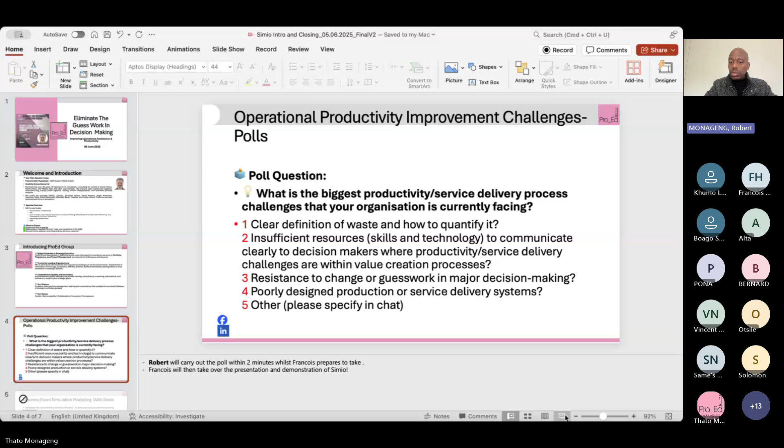So you want me to share from my slides, or are you going to use yours? I am sharing, still sharing. If you can just put them back, because I can't see them from here. We've kind of lost them, at least from my side. I don't know if anybody else can see them. They're back now, so maybe you can go into presentation mode.

I have a simple role this morning, but very important, because it creates an expectation of what we are going to get in the next delivery by Francois. It's really the main reason why we are here this morning.

I think we will all agree that we have a lot of challenges in terms of productivity in Botswana, and this stems all the way from operations to policy. But here we are talking more in terms of operational productivity. So I want those who are in industry to think carefully about the challenges you are probably having in your organization in terms of productivity and service delivery.

I've put at least 5 statements or questions for you to think about. If question 1 resonates with you, type 1 in the chat box. The question is, in terms of productivity or service delivery challenges in your organization, would you say you are currently struggling with a clear definition of what is waste and how to quantify it within your value creation processes?

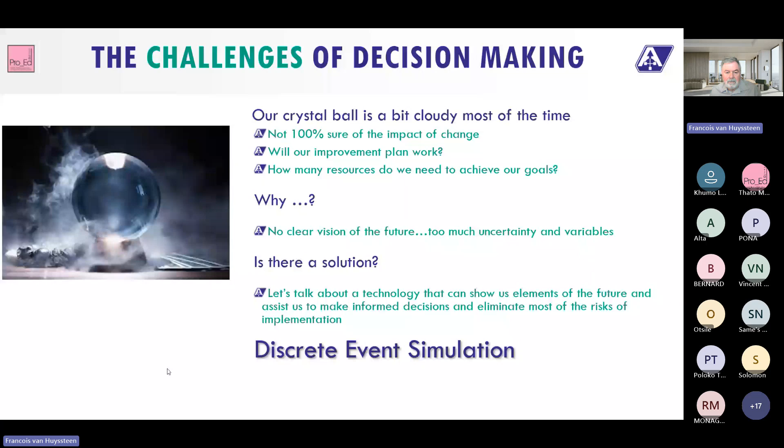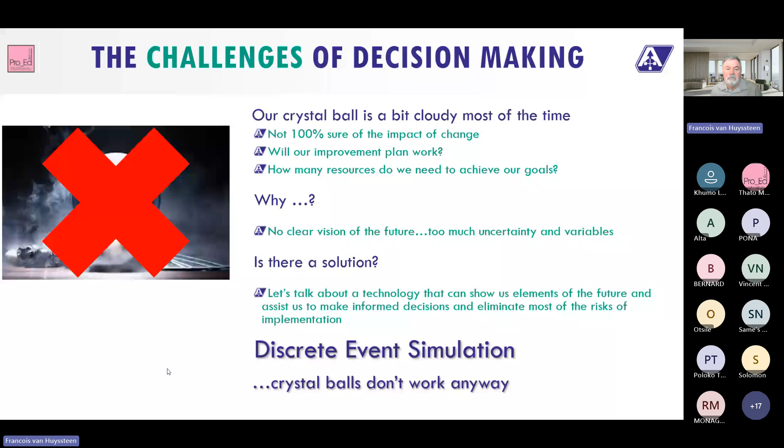So our solution is discrete event simulation, and that's what the rest of the talk is going to be about. Just a bit tongue-in-cheek, crystal balls don't work anyway. We have to make scientifically based, solid decisions. We cannot just play a guessing game. One of the feedback points already was that guessing in decision making is a problem. And I share, many people say, but I have a gut feeling this is going to happen. Yes, you may be right, you may be in the right direction, but you cannot quantify that upfront. And that's one of the big problems. You cannot quantify how change will impact your business. That's the kind of thing we're going to look at and that we can offer you with this technology of discrete event simulation.

So let's now dive a little bit deeper. What is simulation? If you hear the word simulation, I guess different people think different things, have different answers. A short description is it's a model of some sort that represents reality. I think that is basically, in a nutshell, what simulation is.

Now let's look at some examples. I'm pretty sure everybody knows about flight simulators, where airline pilots are trained to handle different situations, because the flight simulator is simulating or representing different runways across the world, different weather conditions, different planes that they're going to fly with, which have different controls. So in the end, it's about training those pilots with this. Remember, what's a flight simulator? It's just a huge model of all different scenarios that sits in there, and you choose one, say, right, we're going to do this route, and then you represent that particular route. And he sits in that flight simulator.

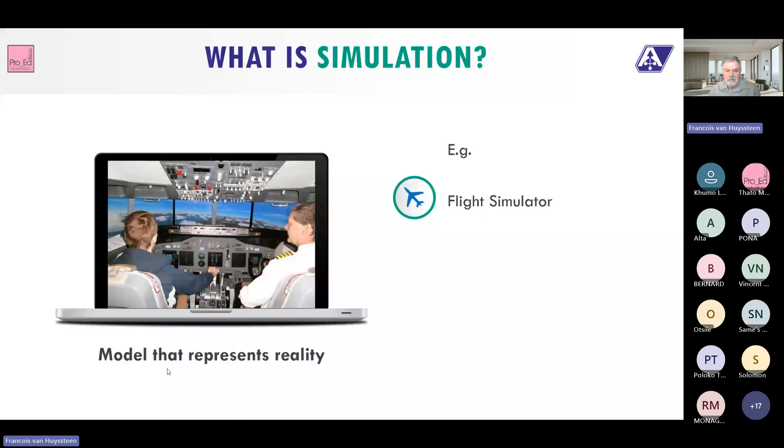Then on a completely different scale, maybe more where people are relaxing and enjoying themselves, games. The games you have these days, played on computers or online, are absolutely insane - the plots in these stories, the animation you see. But what is it really? Each of those games is simulating or representing some other situation, whether it's a specific battle, or a race that you are doing in that game, and you want to come first, obviously, and you race against all these other drivers. It's simulating part of a reality of some sort, and you are in the driver's seat and have to make decisions in that game, right? So that's the kind of thing all of us know, right?

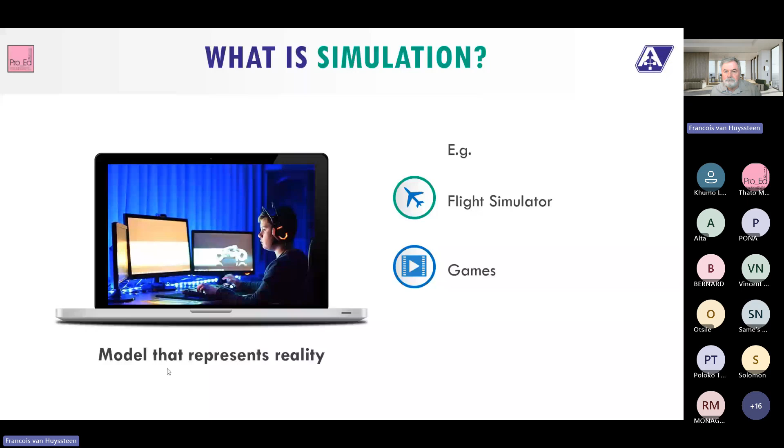So now, one step further, let's talk about discrete event simulation, or DES for short. What is that now? This is now with Simio, the tool that I'm going to show you, in mind.

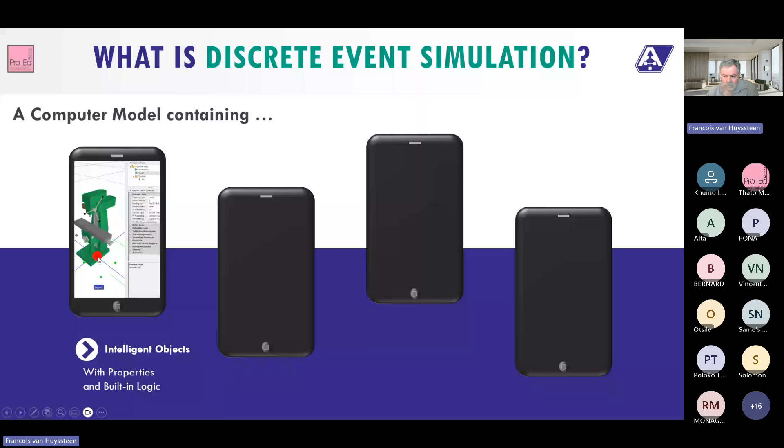So it's a computer model containing intelligent objects. That's an object that you see in the Simio environment, the software. It's an intelligent object with properties and logic built in that gives it that intelligence. It's also a model containing further process logic. These objects and the logic in the background are driven by events.

Now, what could be an event? Let's say, for instance, we model a new bank branch. The bank wants to set up a new branch. They want to know how many tellers they need, how much waiting space they need, and so forth. So an event will typically be when a customer walks in or through the door of that bank. That is an event. Each time a customer walks through, that's an event that kicks off a process.

The process is typically: the customer will look, is there a teller available? He will walk to that teller and start his transaction. If not, he'll say okay, there's the queue, so I'll wait in the queue and so forth. So these models are driven by events, and it could be various events, but it's all driven by events.

Then further, these models do have animation. That means you can actually visualize your process. It's not just a bunch of tables with numbers all over the place and plots that you get graphs from afterwards, that you have to make sense of. You have a picture you can look at that shows you your process in reality, and that really makes the model come alive.

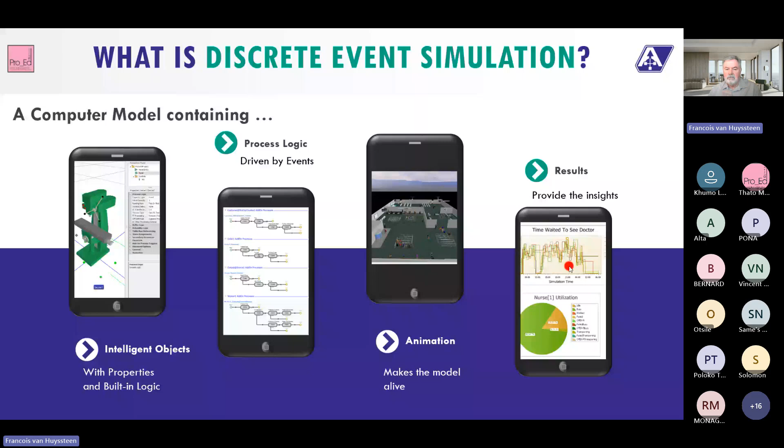So that's a short summary of discrete event simulation: a computer model with, in our case, intelligent objects, additional processes, animation, and that creates results.

So now the question would be, how do we handle a project? How do we approach a project? Where do we start? What do we do?

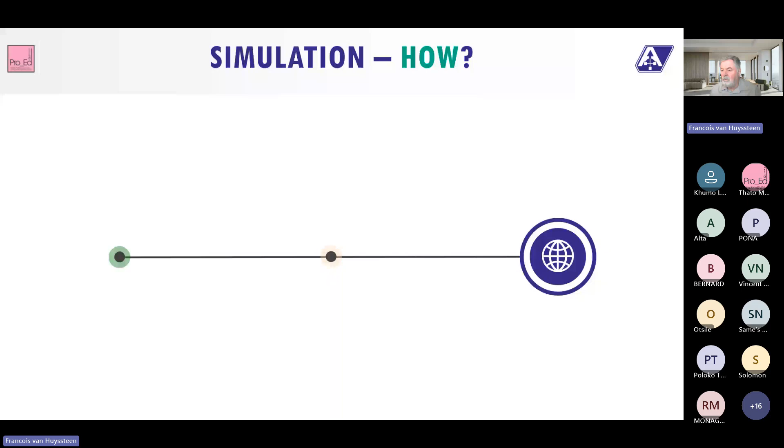What we normally do is we start to create a model of the current scenario, the as-is situation, where we are right now. The reason for that is we have to build a model that we can validate its output, so that we make sure that the results we get from the model are the same as what we are measuring in reality.

If, for instance, we measure in the model that we get 100 units through per hour, that should correlate with the number of units we get through in reality. If we get 100 units per hour in the model, but in reality we get 500, then there's something wrong with the model. Either the input data is wrong or the logic is wrong. That's part of the validation process.

So when we get to the point where the model is giving us the same results as in reality, and from my experience over the years, even in spite of all the uncertainty and variance we have in real life, we were, in every project, about a few percentage points from reality.

We would like 99% accuracy, 98% accuracy, things like that. So with these models, you can achieve a very high level of accuracy when you compare the model's outputs to reality. That's why we start at the as-is scenario, how things are right now.

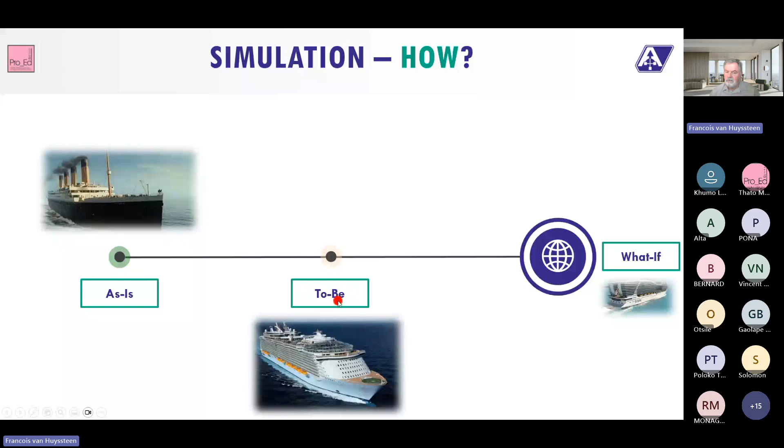Now you see how this to-be scenario compares with the current scenario, and you can start making decisions. But many times there's more than one different scenario, so then you can start playing the what-if game. What if we do this? What if we do that? What if we do the next thing? So you run these different scenarios.

What's important here is that you're basically setting up experiments, and that's one of the areas we're going to spend a whole chapter on during the training - how to set up these experiments. What is it that you can control, the things that you can change? And what is it that you want to measure as an outcome for success? So you do these various what-ifs, compare them with each other, and then you can make a really solid, informed decision on what is the best plan.

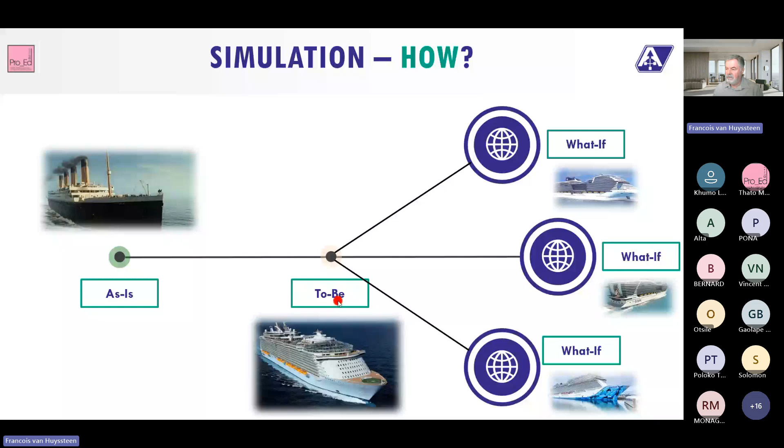I just want to emphasize that the kind of insights we provide management to make their decisions is mainly from an operational perspective. Although you can add costs in your simulation, that's not a problem, there may be other financial models. There may be human resource issues. There may be legal issues. So with all those in mind, and with a very strong input from the operational side, the best decision can be made.

So why do we do simulation? Most of the time it's about testing a new system, a new design, a change that you want to do. So you can test that and have a look - is it going to work? Is it not? If it's not working, what can we do about that?

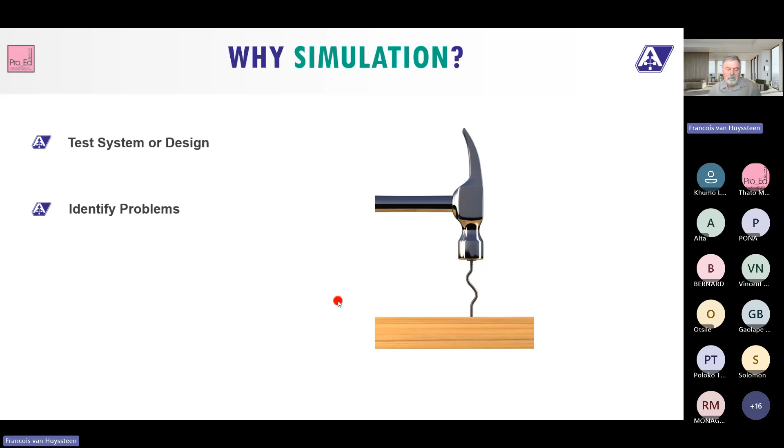And that brings us to the point that the model helps us identify problems - things that you didn't think of up front. Suddenly in the model, a problem area pops up and you see that nobody thought about this. So what are you going to do about that? That may bring along new scenarios, it may bring along a few minor changes to the model so that you can handle these new scenarios and see how we're going to solve these problems. And in the end, it helps us find the best solution.

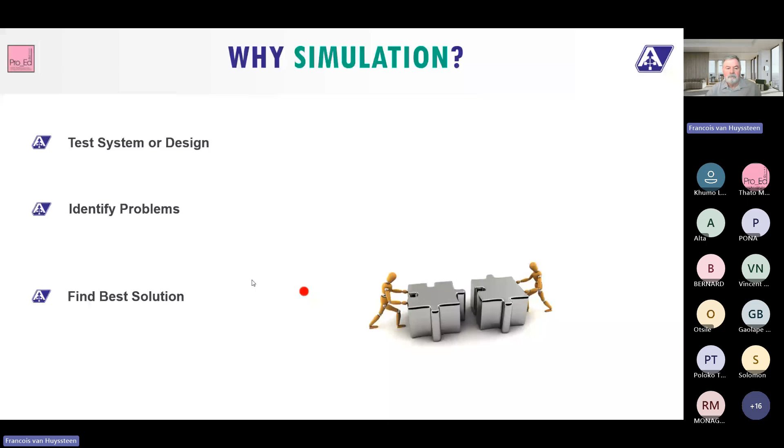Management, then, with all this information in the back, they could really make solid decisions, have much less risk in implementation. And it can happen in both strategic, your longer term, and tactical, your daily planning. Both of those, you can use simulation and really use it fruitfully to make the best decisions.

Let's quickly look at the advantages that we have here with simulation. With everything that we said up to now, it helps us investigate and analyze complex systems - the behavior of different subsets of your process, how they interact with each other.

Systems that may seem to be uncoupled or decoupled do have an impact on each other. By just looking at your process, you may not be able to see anything. But with a model where we can capture any statistics you want, any kind of result you want to achieve, you can really measure anything.

So it allows us to see what's happening under the surface. If you think of an iceberg, normally you have this saying, this is just the tip of the iceberg. That's true here as well. By just looking at a plant, we only see that little bit that's visible, not everything under the surface, the biggest part of the iceberg that's not visible. That's what simulation allows us to do, to look under the hood, under the water, at what's happening there.

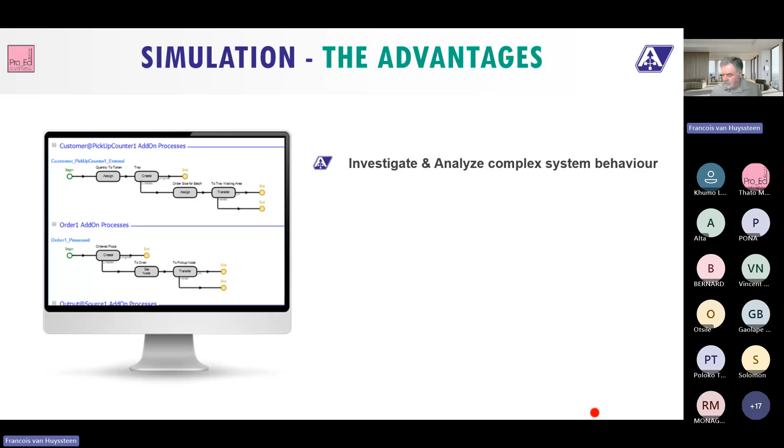With that knowledge, we're in the position to evaluate different alternatives and choose the best one. This is the way we're going to go, and that will be the best in the end with regards to maybe profit, throughput, or utilization, whatever the case might be. Choosing that best alternative really minimizes the risk of implementation. It's going to work as advertised. Instead of just guessing and depending on gut feel, now you can prove it in the model. So it's going to work, and you minimize that risk.

And then, as I mentioned before, using the visualization helps us much better understand what's going on. See, this is our system. Yes, we agree that is where we have problems. And okay, now with the new scenario, things look much better, and so forth. This is just an example of a model I've done at some stage for a company in the gas industry.

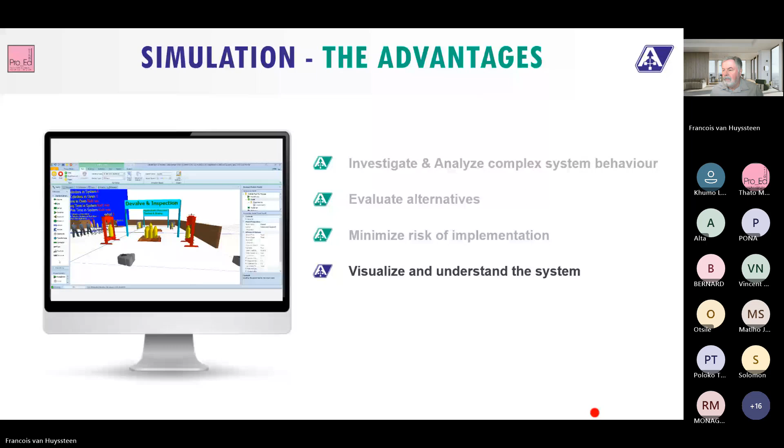At this point, I would quickly like to jump into the software so I can give you a brief glimpse of how the software works, and thereafter we'll go back here. Let me just get to the right place here now.

Right, so hopefully now you can see my Simio screen. Can I just get one or two thumbs there? That will tell me you can see the simulation screen now, the little squares and so forth. Thato, can you maybe just tell me, can you see that? Yes, Francois, thank you. Right, okay, so now we are inside Simio.

So this is the simulation tool that is my tool of preference. There are other tools we can use, but one of the great things about this tool is that you don't have to be a programmer as such. You don't have to do any coding, lines and lines of code. Everything you need to build a model is available inside Simio, so you don't have to do any coding.

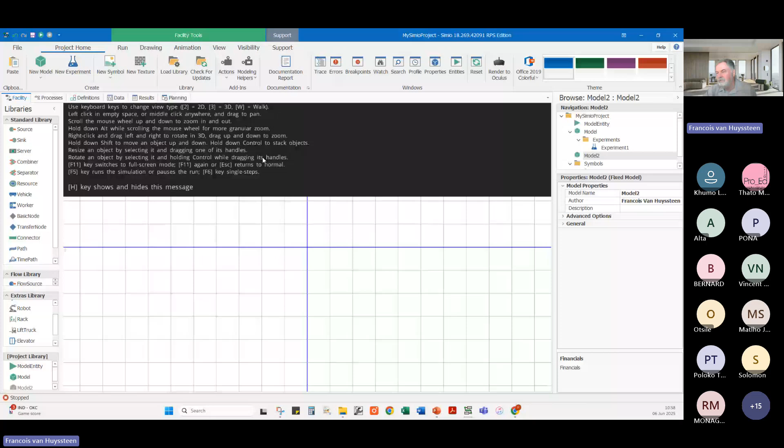Another thing is we have these rich tooltips with very good explanations of everything that you see, what it is and what it's doing, on the ribbons but also on the objects. You can see what this thing is doing, what that thing is doing, and so on.

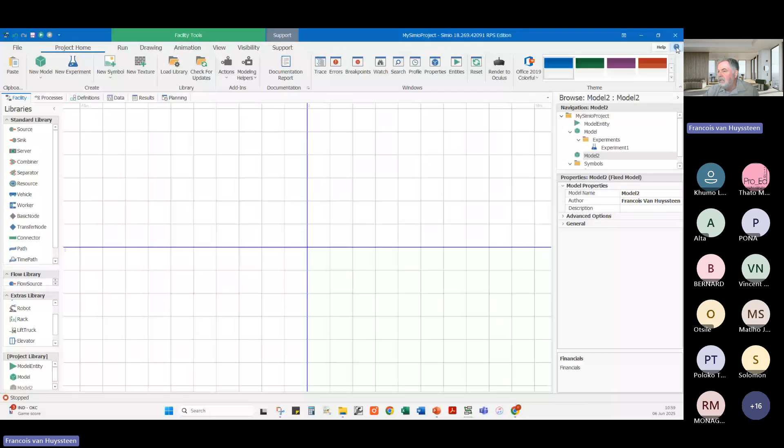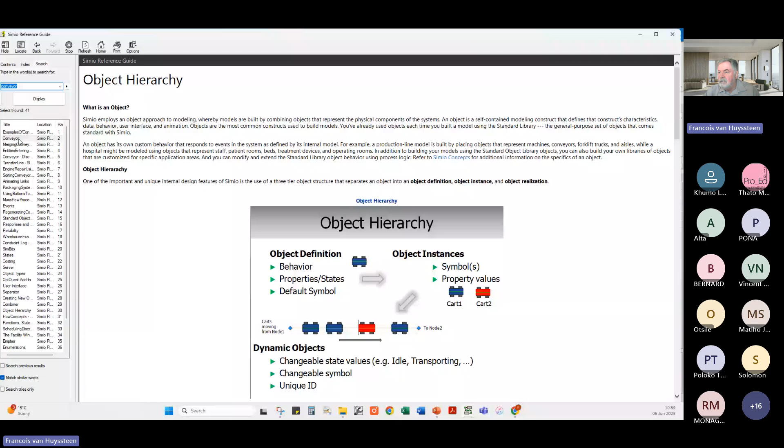One other thing I want to point out is that Simio has a very comprehensive help file, a huge amount of topics you can go into. It's indexed by all sorts of components. You can do a search and say, show me anything that has to do with conveyors, for instance, and there's everything to do with conveyors. If I click on this, it tells us how conveyors work, how to use them, etc. So it's a very powerful help file we have at our disposal.

Sorry, jumping back, let me get back to the right screen. Now I'm going to build a small model, and this is typically how you go about building models. It's going to be very small and simple, whereas in reality things are much more complex. So I'm going to put a source.

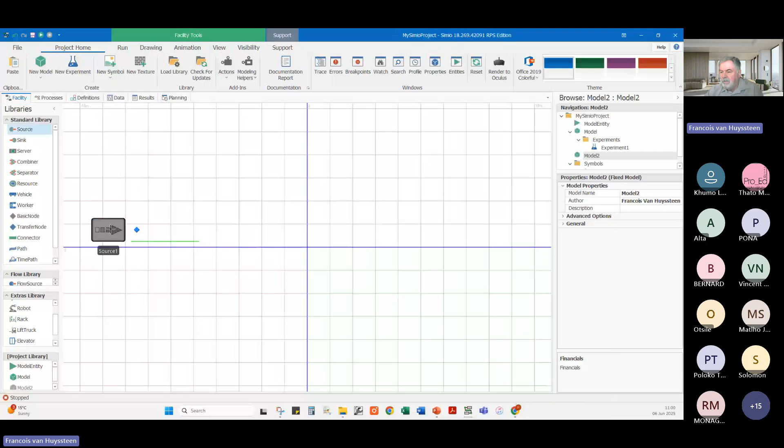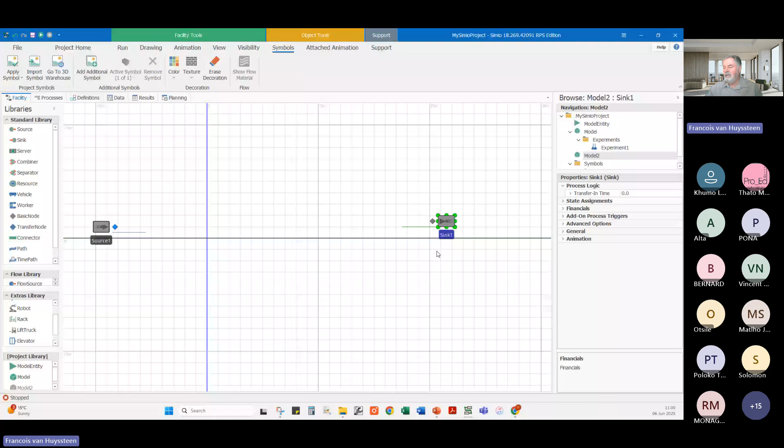Remember we said we are working with events that drive our models, so a source is the object that creates those events. Then at the end of the process we also want to put a sink. The things that get created, which we call entities, could be people, parts, vehicles, whatever the case might be, created at the start of the process. Right at the end, once the process has gone through the whole process, we have to discard them, and that's what the sink does.

And then right here in the middle, we're going to put what we call a server. That can represent a workstation, basically any kind of resource. There's a lot of intelligence already built in here, but that's what we're going to put in for now.

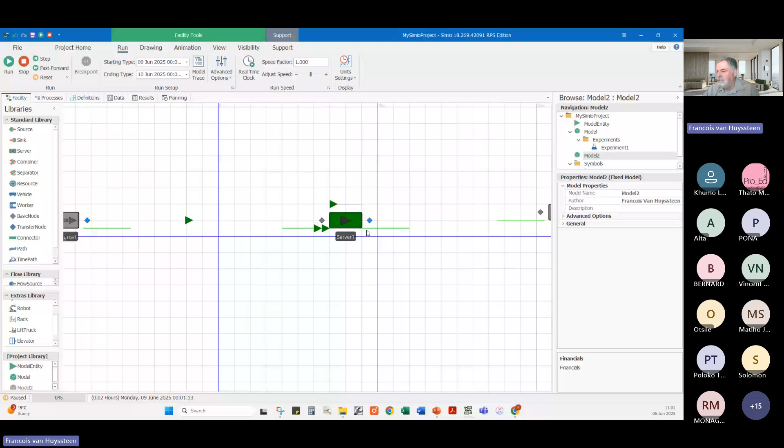Now I can go to the run ribbon. We run the model, and things are happening. So what are we looking at right now? First of all, these little green triangles are entities moving through the system, being generated here at the source. As I said, that could be people, parts, or anything moving through your process and being processed as you go through it. This here could represent some other workstation.

So these green lines, what are they? That is queues related to this server object. The first one is our input buffer queue, where entities or parts will wait in front of the machine to be processed while other parts are being processed. That green line on top is the processing queue, showing the number of entities being processed right now, busy in the middle of the process. And at the end, that is our output buffer.

Let's talk about a manufacturing facility, for instance, parts that have been manufactured at this point, or components manufactured for a final assembly later on, will wait here to be picked up and taken to the next station. So now you can start thinking about constraints. We only have limited space on the incoming side, and limited space on the outgoing side. Sometimes there's no space, and that is a constraint you can start working with.

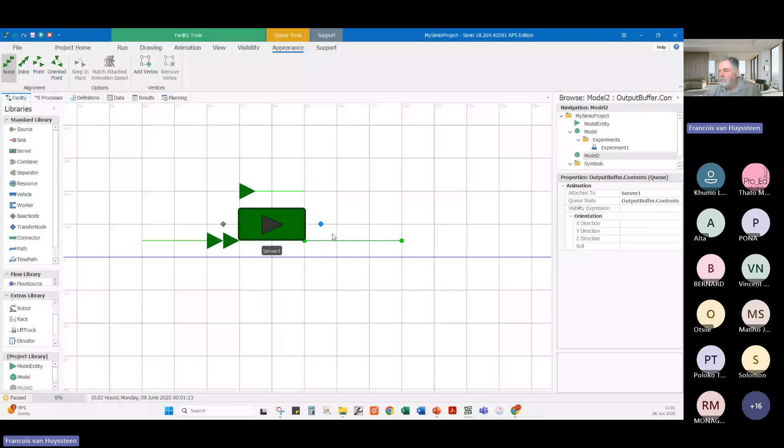On that point, I just quickly want to show you the properties that we have. If I click on the server, let's start there, you'll see on the right-hand side there's a lot of properties, and I'm not going to go through all of them now, we'll dive deeper during the training. But for instance, the queuing rule there is first in, first out. Let me just stop the model for now.

It's first in, first out, or last in, first out. You could also look at the smallest value, for instance, pick the next guy in the queue that's been longest in the system, or that's the largest value.

Then there's capacity type: is the fixed capacity always available, a certain number, or do you run according to a certain work schedule? Then there's reliability - no failures, or calendar time-based failures, or processing count-based failures, like for cleaning, after each 50 components you have to clean the machine.

Then there's some financials, activity-based costing built in here. Remember those processes I showed you on one of the previous slides - this is where those add-on processes are called, and we're going to dive into that level during the training.

If we now look at the output buffer, you can see its orientation, its contents. That's as far as the visualization part is concerned.

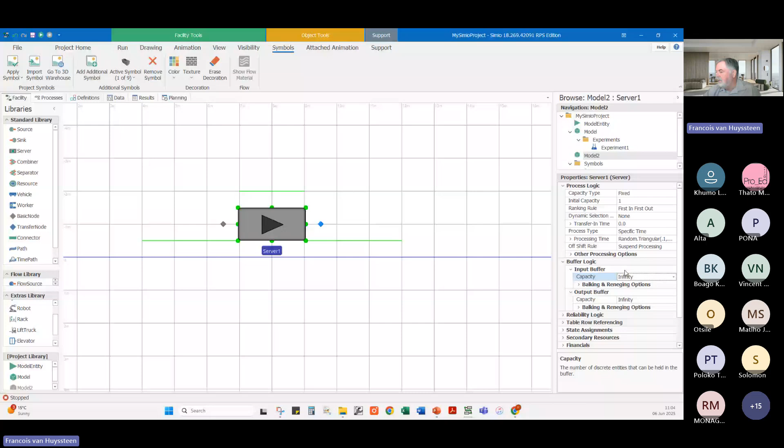But if you click on the buffer and go to the buffer logic, we can give those input and output buffers a capacity. The default is infinity, but you can put some other capacity there, 1 or 2 or 5 or whatever. So each object has these properties, and that's where you set different rules for when you run that.

So now what I'm going to do next - up to this point, the entities just moved in free space from one object to the next, right? Now I'm going to add some paths.

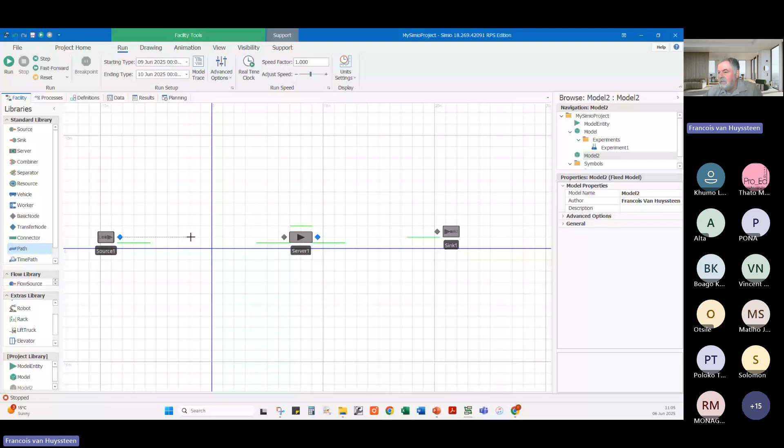I go to the path object and put a path in here. Let's say I do just a path like that, and another one there. So these are just paths - that means entities are moving on that.

But this one here, actually, I want to rather make that a conveyor. So I just right click and say convert that to a conveyor. I can also delete it and choose the conveyor from my object library, but I can just convert it here. By the way, maybe let's make that one with a little picture.

Now we run it again. One other thing I want to mention here is the background that you see - hopefully you can see there's a 0, 10 meters, 20 meters. That means size matters when you work in Simio.

So you'll typically import a layout drawing of whatever it is that you do - it could be a mine layout, a manufacturing facility layout, or a warehouse layout. If that drawing is drawn to scale, then Simio will scale it automatically, and your distances are then sorted.

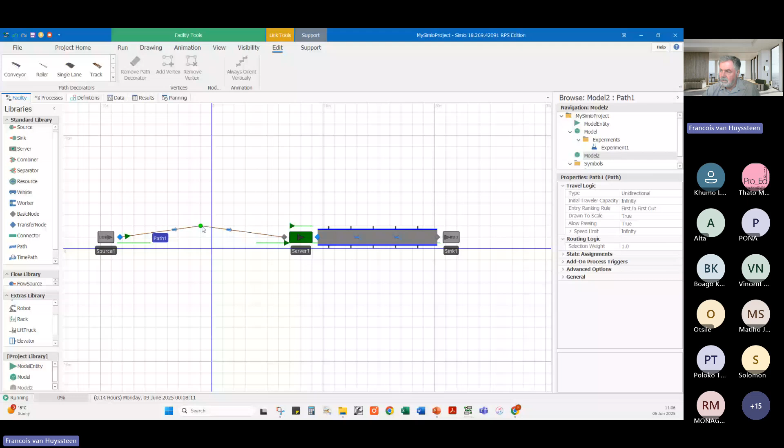So if, for instance, I make this route like this, that means there's a longer travel time because the route is longer. I can also add another path in here, and you'll see sometimes entities will move that way, sometimes this way, where you have to bypass this. So this is the very, very basics of running a model.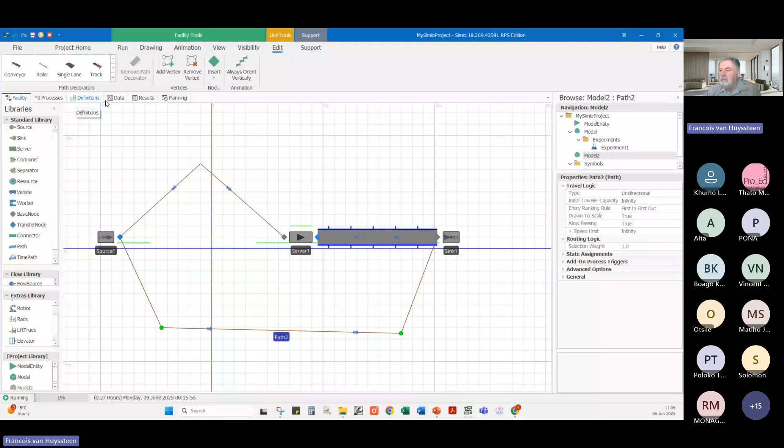And now I can actually run this. Let's go to the run quickly - we can fast forward this. Then we look at our results, and we have a pivot table with all our results. This is one of the ways of showing or displaying the results, and this is what we use most of the time.

Now we can maybe create a unique report, but instead of searching through all the detail here, say we're only interested in the time in the system. So we say, only show us the model entity, and we only want to see the number in system and the time in system, so we can use that filter.

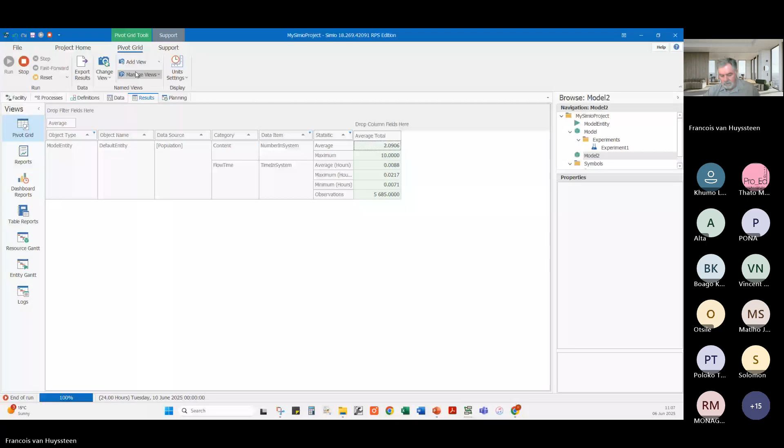So we can say I want to see the number in system, how long they spent in the system, and we can now name this - we can say number in system and time in system - and this is now our one report, a customized report. So you can go back and say show me everything, or show me this particular report, and then we see this.

So the number in system on average was 2, and the maximum ever reached was 10. The time that they spent, from the time entering the system till the time exiting the system, is 0.0, and this is currently running in hours. So we can change this to minutes if you want to do that. Then we say, average 0.5 minutes, maximum 1.3, and so we carry on.

We talked about experiments, so just to show you briefly, let's quickly do an experiment. Later on, we're going to look at that further. So we can run an experiment now.

With simulation, we are working with a lot of statistical uncertainty. That means you have to do multiple replications, multiple runs of the same thing, so that we can get to the best answer. So now we've quickly run an experiment here, and you saw that it ran very quickly because it's using all the cores and all the processors on your computer. So these different replications can run simultaneously.

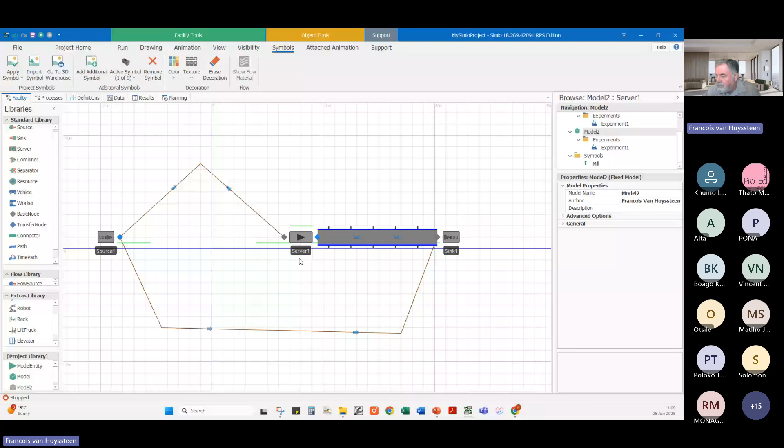I'll show you just now an experiment in another model where we can have a look at some more detail there. Then in this model again, there's some subcomponents of an object. It's a main object, but also these entering and exiting nodes, that's also objects in its own right.

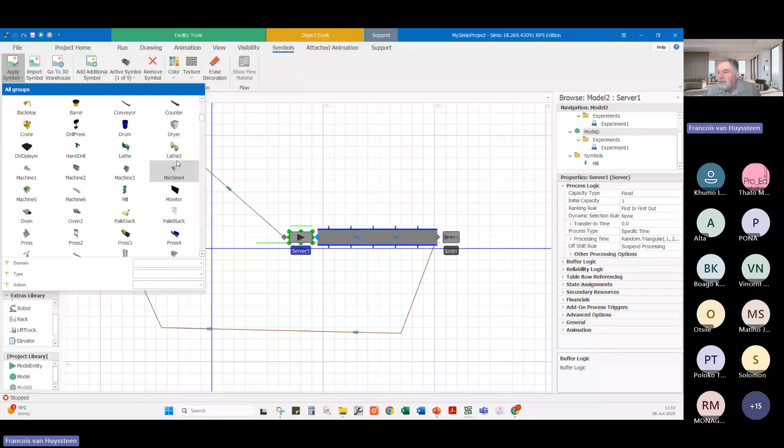Okay, so then I think you've seen now how to run this. Maybe the last thing I just quickly want to show here is that, let's say we want to give that server there a nice picture, right? So we can go down there, and let's say we go to this.

It's a mill now. Now if I hit 3, this now is a mill. And maybe I just want to make sure that that is the right height for this processing queue. Let me just move it a little bit in the vertical level, right? So there we are. Can zoom in a little bit, move it here.

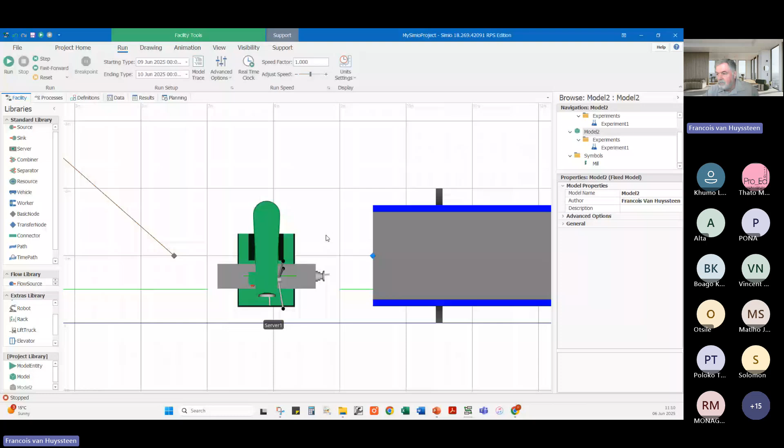And then when I run it now, when I put it in 3D, we run the system and let's see what's happening. So then the entity is coming, and there we saw that, right? It sits here. Okay, maybe my queue should just be a little bit lower so it looks more realistic. So there it is, nice in 3D without any difficulties to do that.

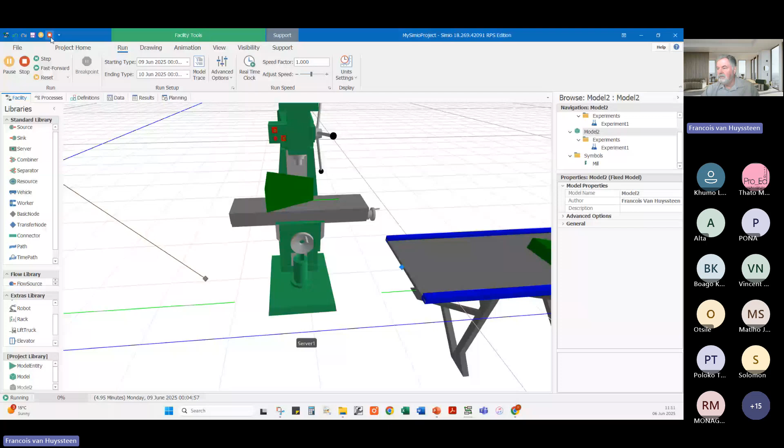Okay, so I hope this gave you a good idea of how a typical model can look, and as I said, this is a very, very simple one. Then I just want to briefly, before we carry on, show you on the support ribbon what else you have available in Simio.

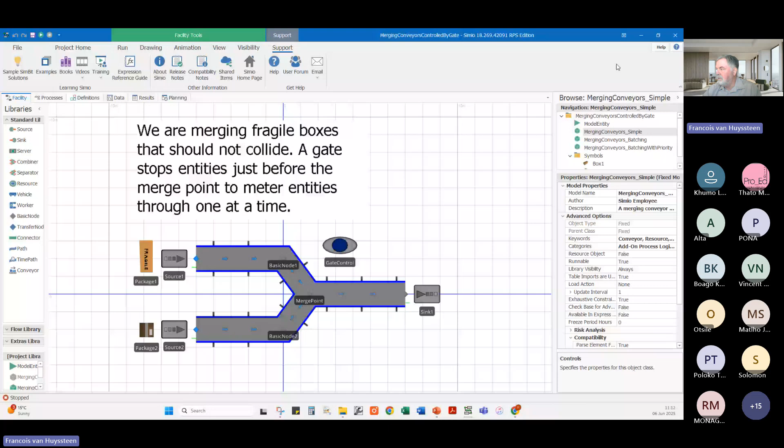Sorry, let me just quickly go to the support ribbon. So there we have SimBits. That's to give us really a big learning experience. After you've done the training, there's all these - I think there's over 300 of these models. And when you open up those models, you'll see the model, a short model already built, with a document that explains exactly what they've done in there. So this is very powerful for helping you learn more about the software. When you get into a project you haven't done anything before, you just go and search for that topic. There should be a SimBit, and you get this documentation and you get this model. It'll show you, right, what you should do.

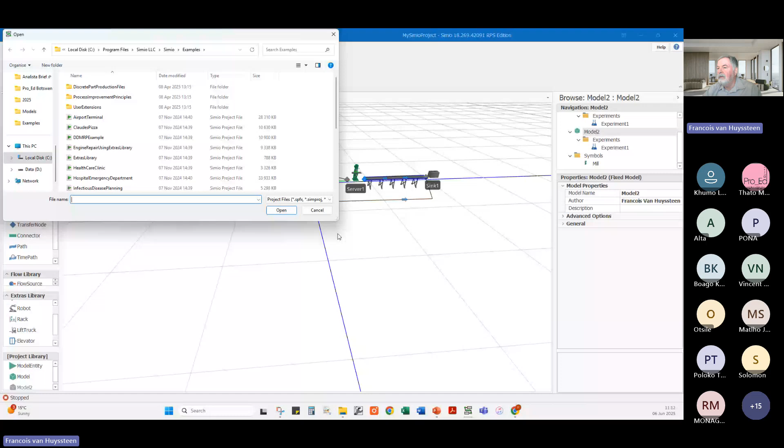Then further, there's a lot of examples that you can show, and I've opened one before this. And again, those examples, they come with - it seems to me I've deleted that. So right, let me just quickly open up this one. I'm not going to save this one, and we're going to open up the airport example. So just give it a few seconds to quickly open.

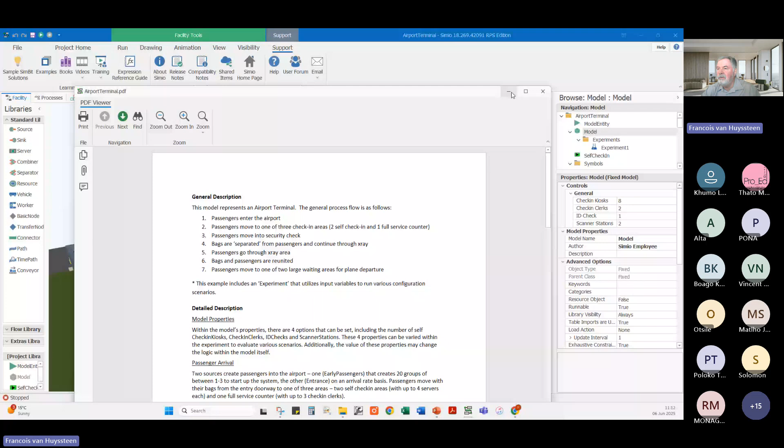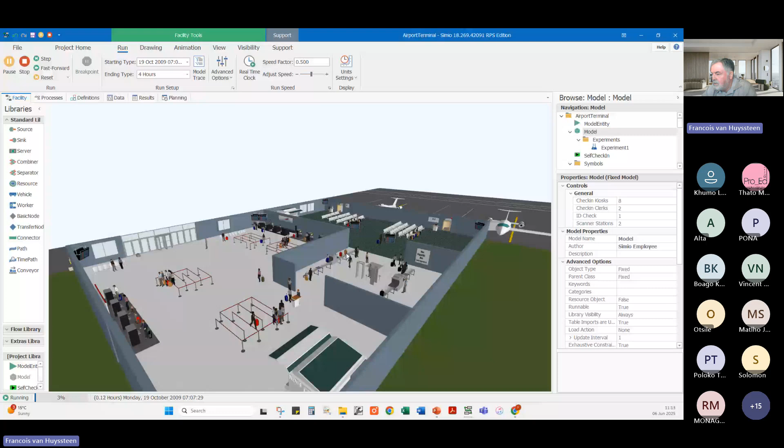So again, it opens up with a PDF document showing exactly what's happening. And then if you run this model, and maybe let me just increase the speed a little bit so you get it a little bit further - there, this is at an airport. So there the people, there's checking at the normal desk, checking at the kiosk, the self-service. Then they go through the scanning. You check your passport there, go through the scanner, the luggage is going through the scanner, the persons are going through the scanner, and from there they move on to the waiting areas where they wait to get into the plane.

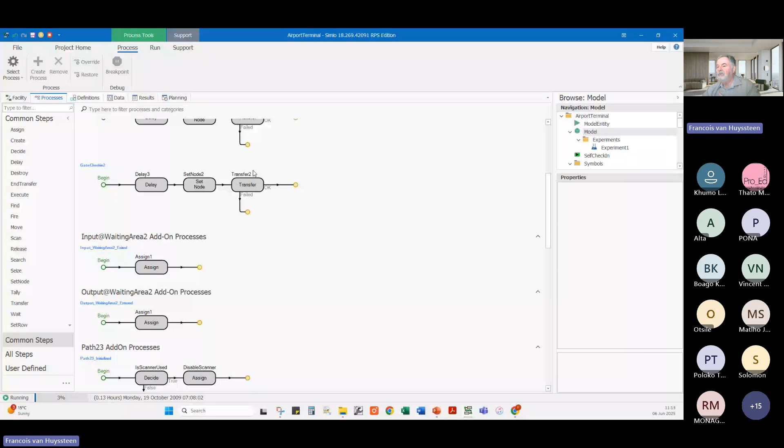Now I talked about those add-on processes. This is basically how they look. These are the processes that can be called by the objects, and that will help you to then do some more complex logic, decision logic, and so forth that's happening inside your model.

Right, so this is just another example of how a model could look like. Back to our, let me just get back to the model here and our support window.

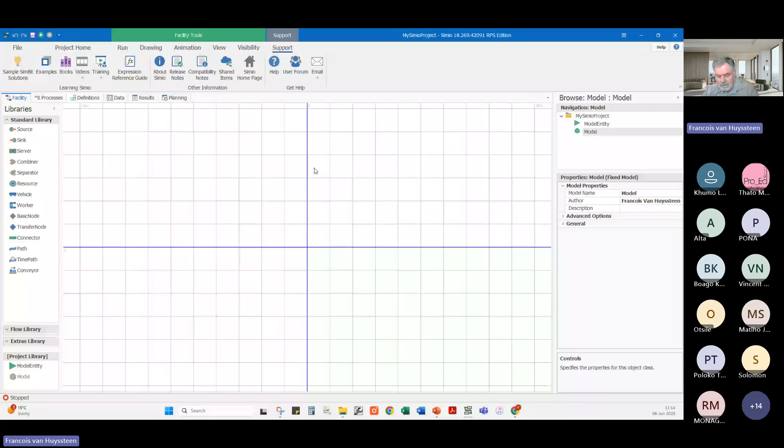Then there's a lot of books available. It takes you to a website where you can download ebooks. There's a lot of videos available, training options, and this reference guide. It tells you at the top what version you're running and so forth. So a lot of additional support functions you also find here inside the software. You don't have to go outside to do that.

All right, then I think I've shown you everything in the software. So let's quickly, one last thing, at the results, there's also this dashboard function. That is to create post-process results, and this is just one example of that.

For instance, once you've run the model, because you can fast forward it, meaning run it without animation up to the end, then you can look at your graphs. You get there quickly, you can zoom into each of those and see what's the waiting time, or you can switch off the filter again.

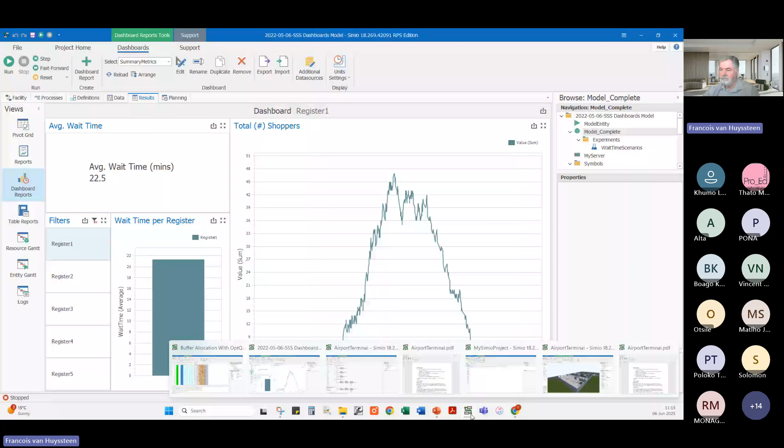And then the very last thing I want to talk about is optimization. There's a tool called OptQuest that's been used with Simio. I've just run this prior to this talk. OptQuest is a true optimization tool, using very well designed optimization algorithms to get to the optimum very quickly.

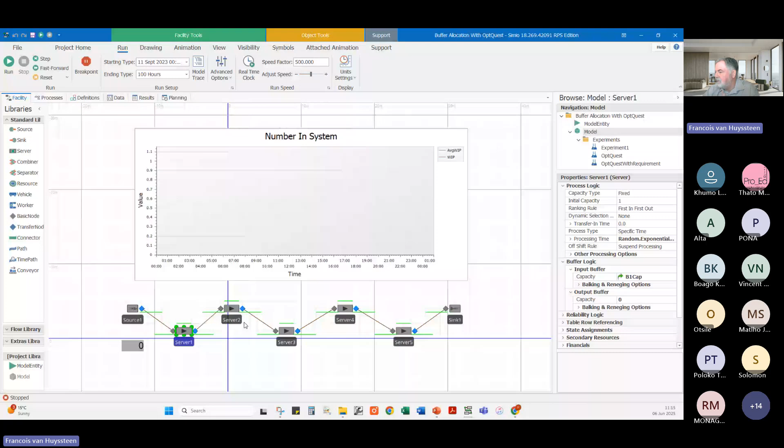So in this case it's a very simple model where there's just 5 of these workstations. Each of these have a buffer capacity, referenced by calling it B1 capacity or B1 cap. This one's got B2 cap and so forth, and that's the things that you can change around.

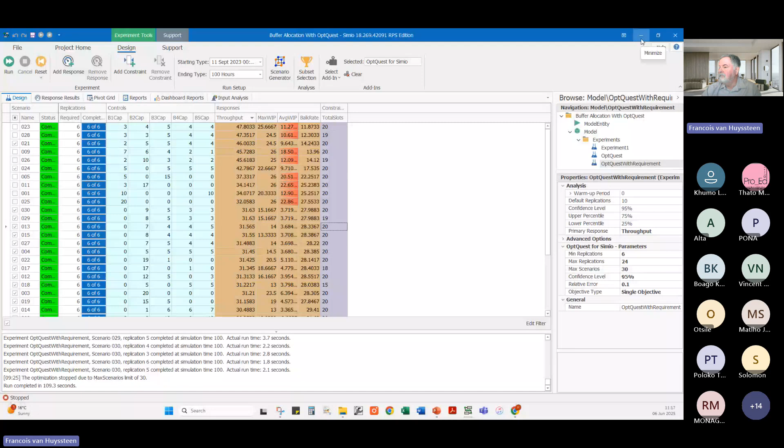Now briefly, I see we have about 12 minutes left, so briefly, let's just talk about a few projects we've done.

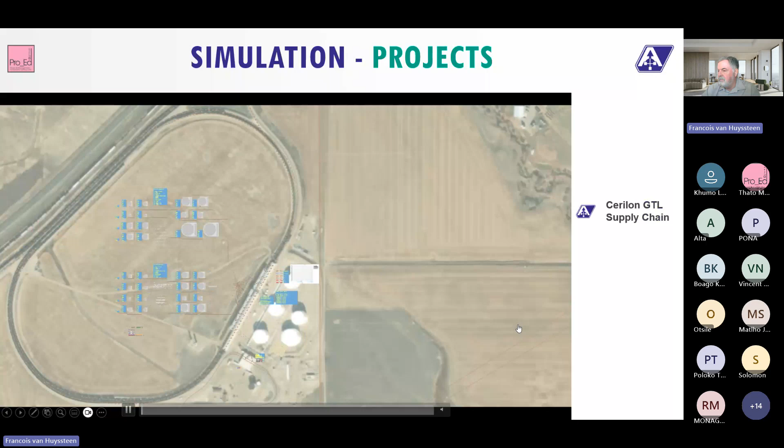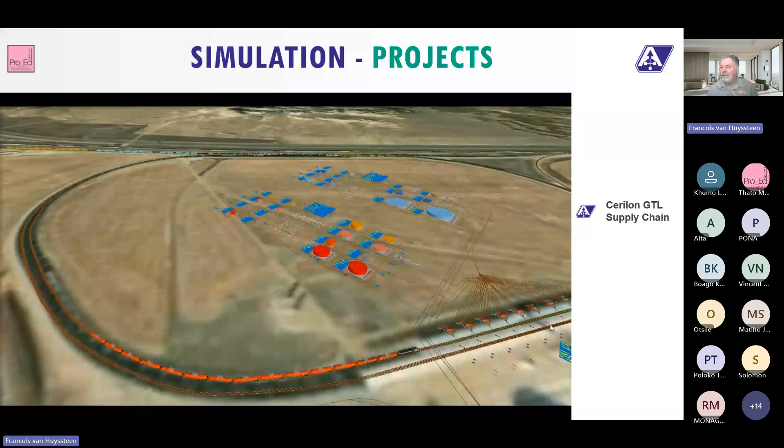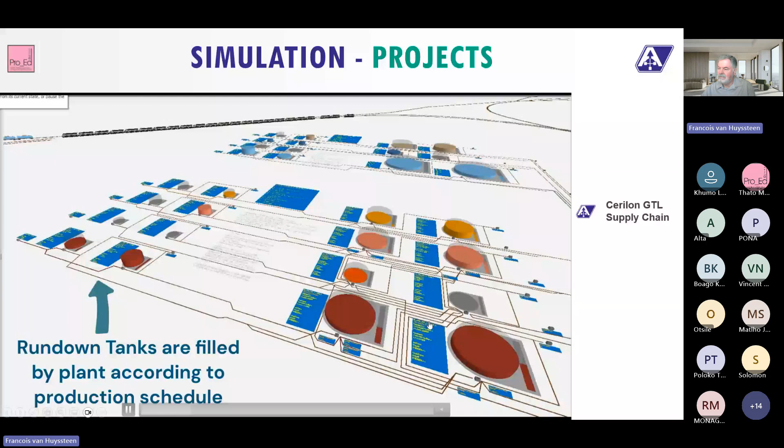This is a recording, and I really hope on your side that you will see enough of the movement. It's a gas to liquid plant, and remember, this is one of those reasons why we do simulation, to test the system. This is a brand new plant, greenfields, absolutely. Here it's about testing the design of the tanks, the integration of the tanks, the sizes of the tanks, and how the loading facility, where the final product tanks are being loaded, loads the products onto train rail cars and into road trucks. Can the loading facility handle the anticipated weekly production?

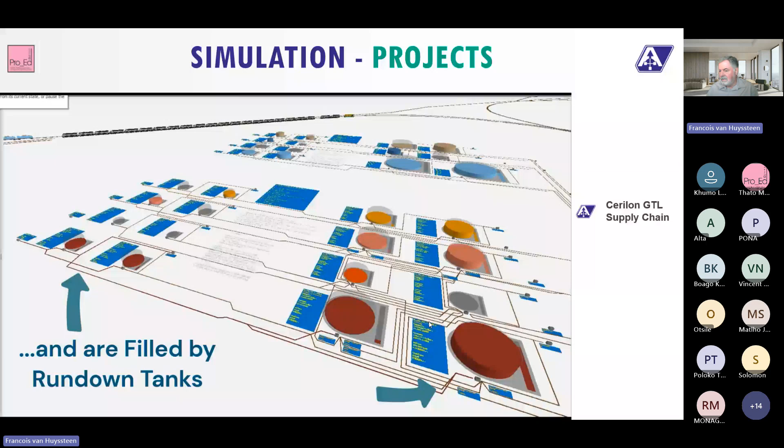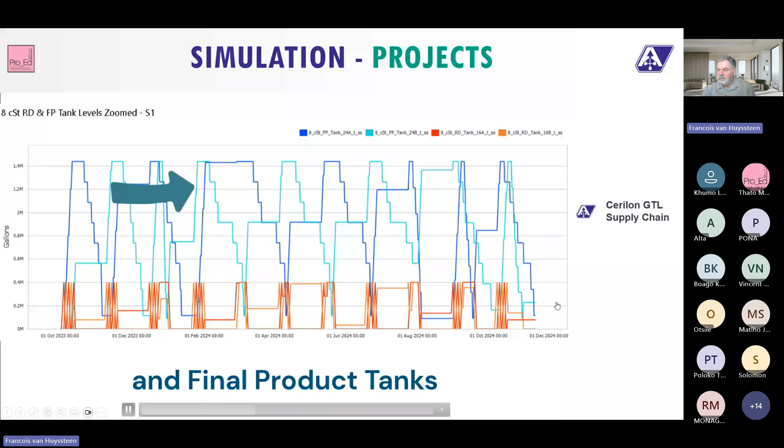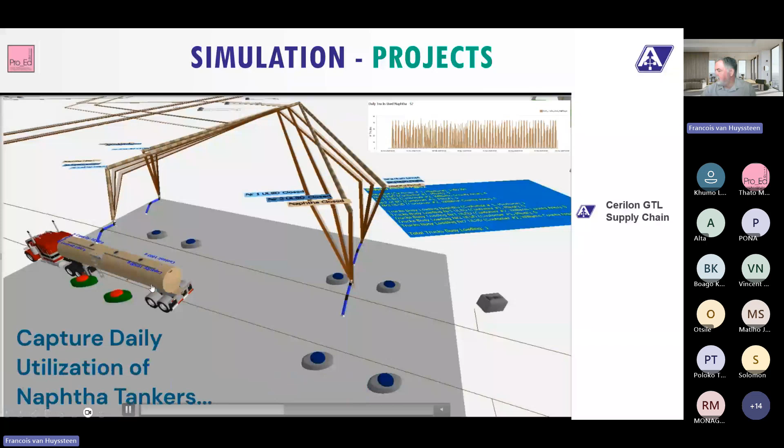So this is some of the output then created, where we get a lot of insight into the interaction between the different tanks. These are the tank levels, and you can see the interaction between those tanks. As they get fuller, they load out, and that load out is into a final tank, which is a final product, and so you can carry on. So there's just how the trucks are loaded, and you can see the specific product coming through there. We've used colors to indicate the different products.

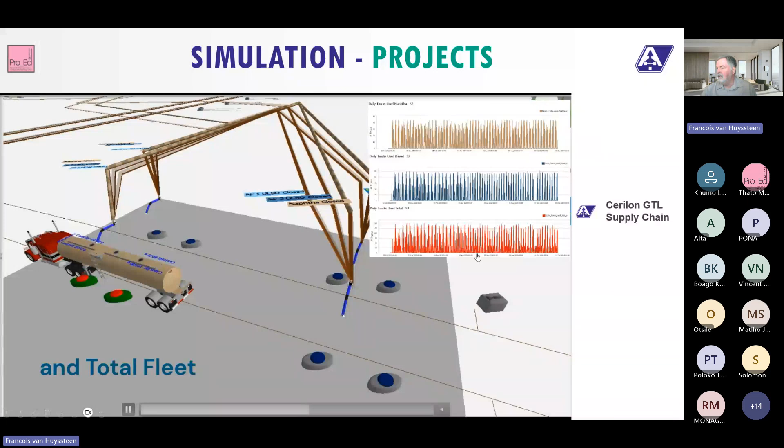And there's some graphs looking at the utilization of the trucks on a daily basis. Further on, let me just see, just after that, will show us some more of the statistics. Again, the light blue means it's a certain product.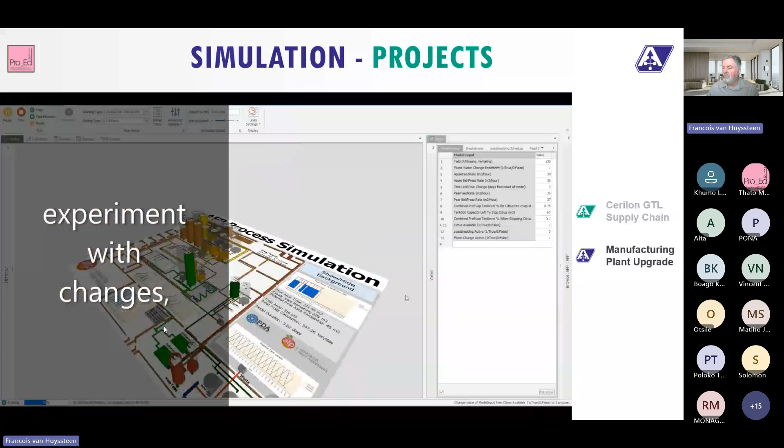In this case, the model was developed, and we provided some initial outputs and results, but we handed the model over to the client so that they can use it, and we obviously provided the manual on how they can use that. Hopefully, after the rotation is done, let's just move a little bit further.

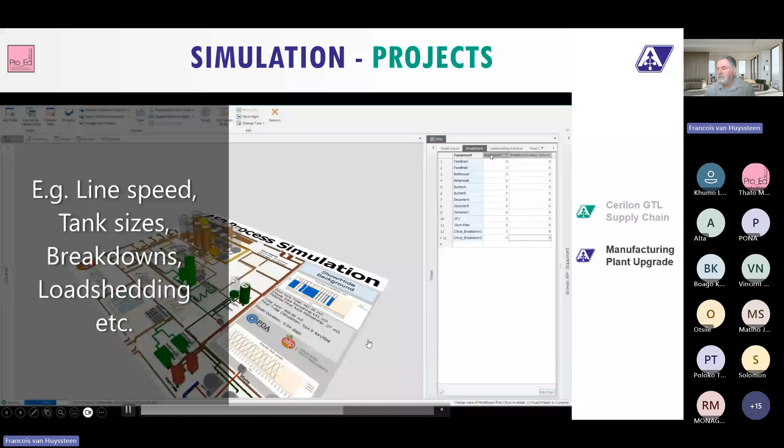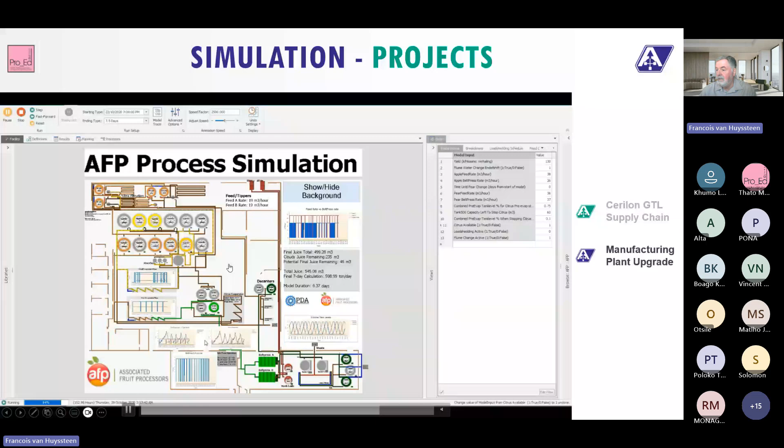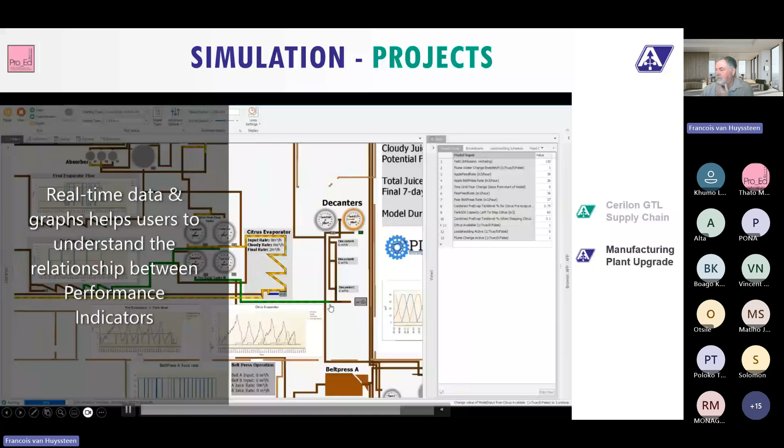Then you should be able to see the tank levels going up and down and so forth. So they could then use the model afterwards to experiment with different scenarios, what's happening in summertime, in wintertime, because in the fruit industry, seasonality plays a huge role. And then they could determine for their new upgrade whether the tank capacity is enough - not too big, not too small, just enough - and that the conveyor belts they use here and there are fast enough and wide enough and so forth. So that was this manufacturing plant.

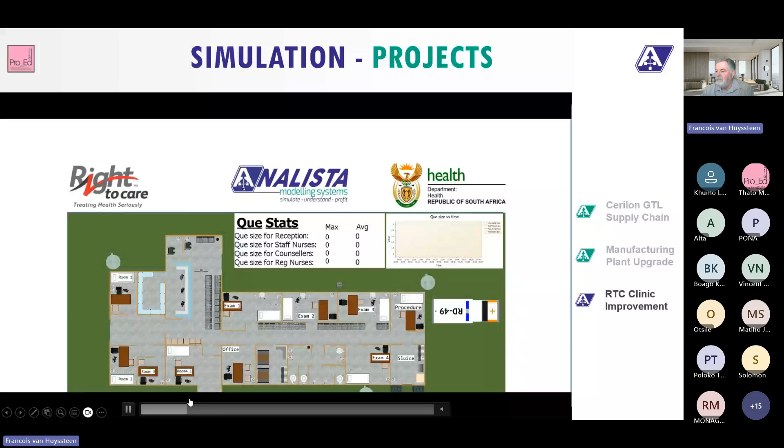And the last one, if you just skip a little bit here as well, in the healthcare industry, here it was about determining for a new clinic that they wanted to build how many consulting rooms they need, how many of the different types of staff they need - how many staff nurses, how many counselors, how many registered nurses.

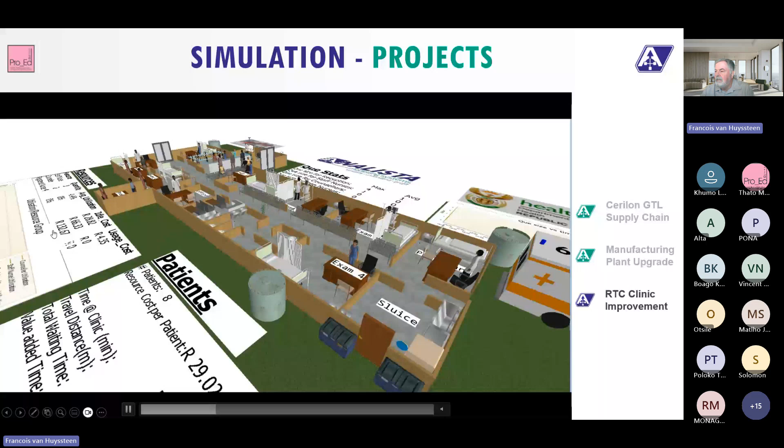So in this model, we built in some cost. You can see there on that part of the screen, there's some cost built in. But also, we tried to measure up front, looking into the future, what the typical patient experience would be - how long will they wait with a certain number of these resources. Obviously, you want the patient's experience to be as good as possible.

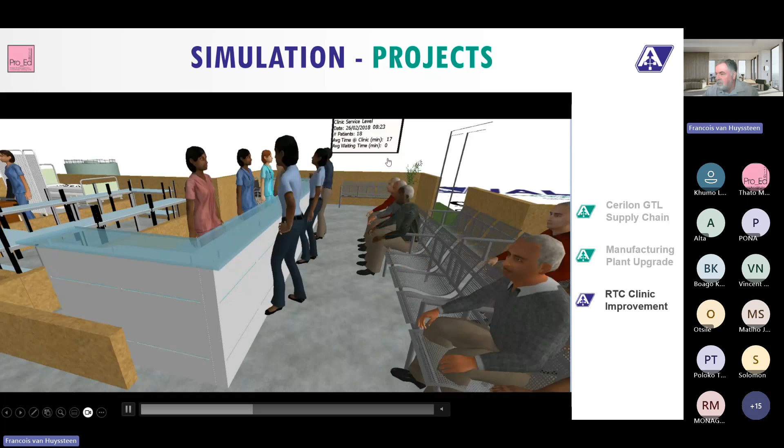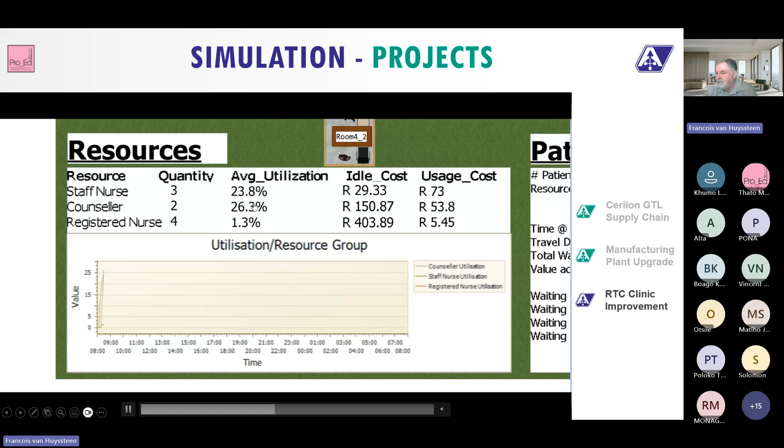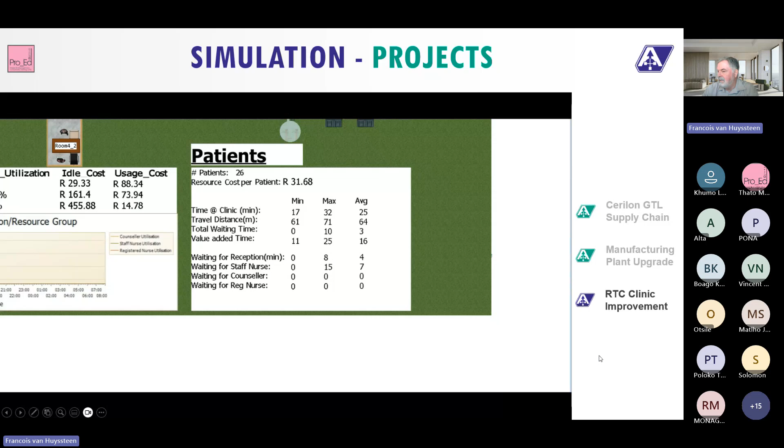And there's typically your LED panel sitting there showing us all the stats - some of the stats generated with regards to costs, utilization for a certain number of these resources. You can see the plot here developing over time as we go about. I wish there was time to show more of this and run it longer, but I think that will give you a brief glimpse into the life of discrete event simulation - what's happening, what we can do that for, how it looks like, and so forth.

So from our side, as you've seen before, we've worked in quite a number of different places, learned a lot about different industries, and I'm offering that experience to you as potential new customers of this technology, users of this technology, to reap the benefits of discrete event simulation and a great tool like Simio.

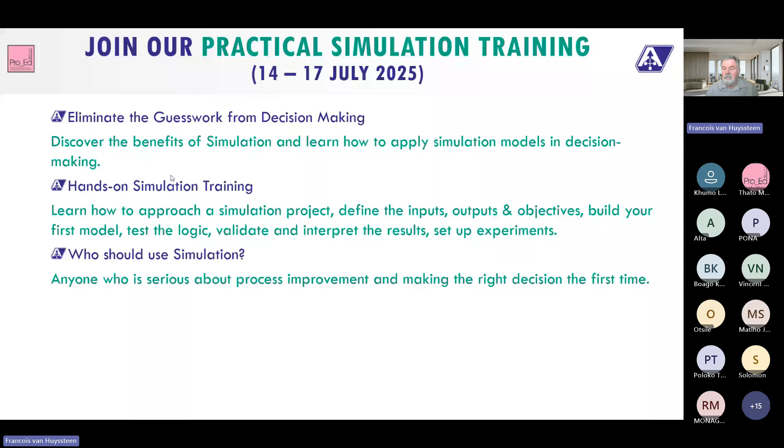And then the question is right now, who should attend this? And I would say anyone that's serious about process improvement, whether it's from your process improvement team, whether it's production managers, whether it's any other managers, typically, or industrial engineers, right? Everyone that is involved in how can we improve our processes in our company. That's the kind of people that we would like to invite seriously to this training.

And the immediate impact that you have when walking away from the training is really that you have practical knowledge, actionable knowledge of how to develop models, and also how to use simulation now to, in the end, make better decisions. And I think Thato will maybe refer back to this again, but you can start registering for this on the ProEd Group website. And that is my story.

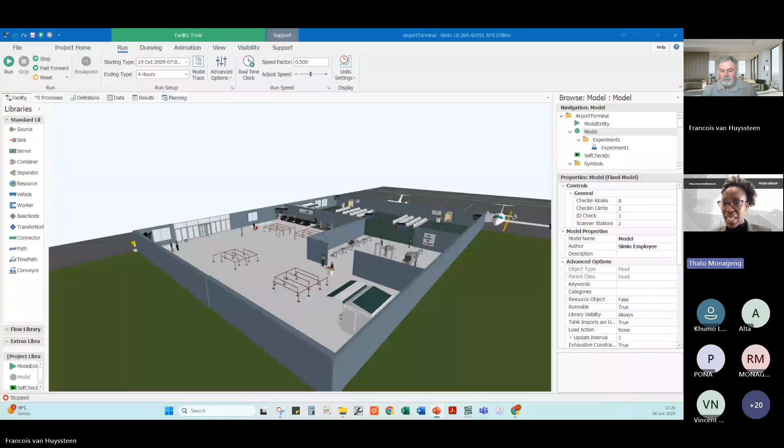Thank you. Wow. Thank you so much, Francois. I think at this point we can quickly open up the question and answer session, which Mr. Monageng will moderate. I believe you've been collecting the questions there. Kindly facilitate. Yes, thank you, Thato. I'm extremely smiling where I am. I love this technology so much. This is one thing that I think we are missing in Botswana. There are a few questions, but you can keep them coming. Some are on the chat and others on Q&A.

The first question, Francois, was, are there any disadvantages or shortfalls? I suppose this with regards to discrete event simulation. That was the first question. And then the second one was, can it work for banking or finance sector? And then the third one, I'll just say the third one and then we can, okay, go ahead. Okay. You see this at my age, I don't remember that long in the past. Okay, so let's take two at a time.

Right. So first question was, I think disadvantages or shortfalls. I won't say disadvantages or shortfalls. I'd rather put it differently. I think the one thing that's very important, if your data is not correct, then the outcome will not be, it will be a waste.